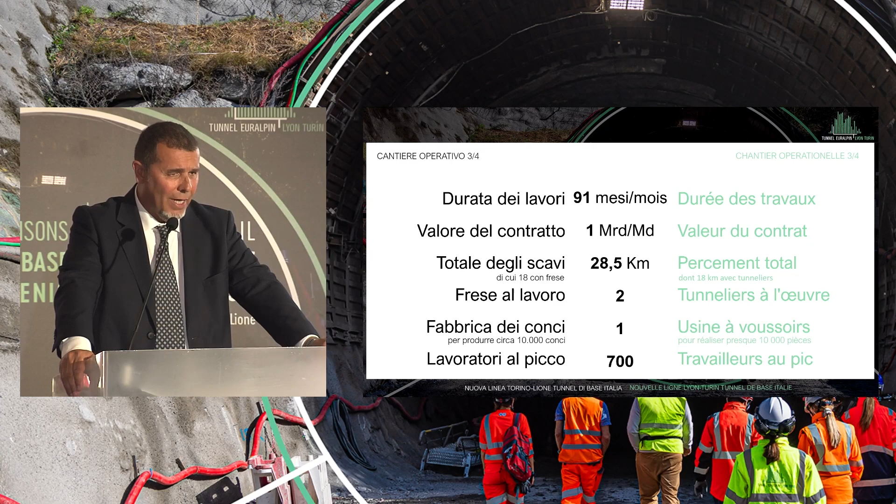As you can see in the slide, the work will go on for 91 months, 7 years, for a contract worth about 1 billion euros. The total length of excavation is 28.5 kilometers, of which 18 will be excavated by TBM, and you'll have more details about that by the work manager, with a positive consequence on job creation in the territory, because we have 700 more workers in the peak period.

So just to conclude very quickly, here you can see all the contracts awarded so far, and these are all. So you see just the skyline of our Alps between Italy and France, and all the operational construction sites. All of them have been awarded to rather outstanding groups of companies, mainly Italian and French companies, with some Swiss companies, both for constructions and work direction.

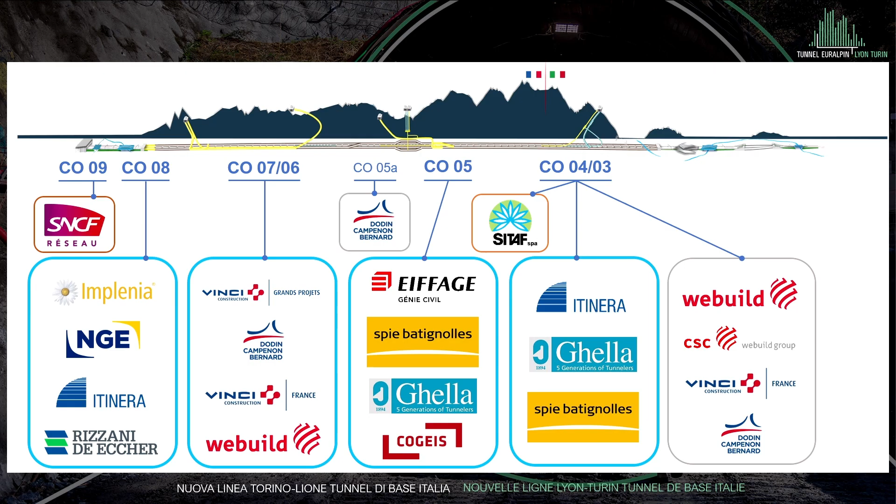We have awarded these contracts to very, very high-level companies, and this is justified by the value of the work, which is almost 10 billion euros that will be achieved by 2032, and all the contracts are worth from 300-400 million euros to several billion euros. We have already excavated 34 out of 64 kilometers of tunnels, and there are works in progress almost across the line, both in Italy and France.

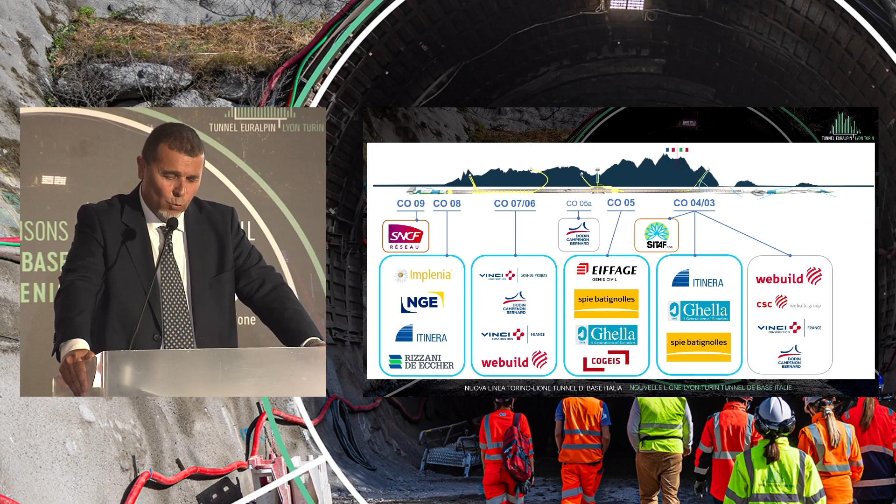So we want to turn it into a railway tunnel, and we have launched the contract for technological installations. It is worth 3 billion euros. It will start in 2027, and it will be completed in 2032. So with that, I'm done. Thank you for your attention.

Thank you. Thanks, Mr. Bufalini, for the details and the explanation. And of course, congratulations to the Italian-French companies that will be in charge of this tunnel, whose length is 28 kilometers, and we're going to touch it too sooner or later. But before leaving the floor to the construction manager, we have a short video to play to show you the site where the TBMs will start working.

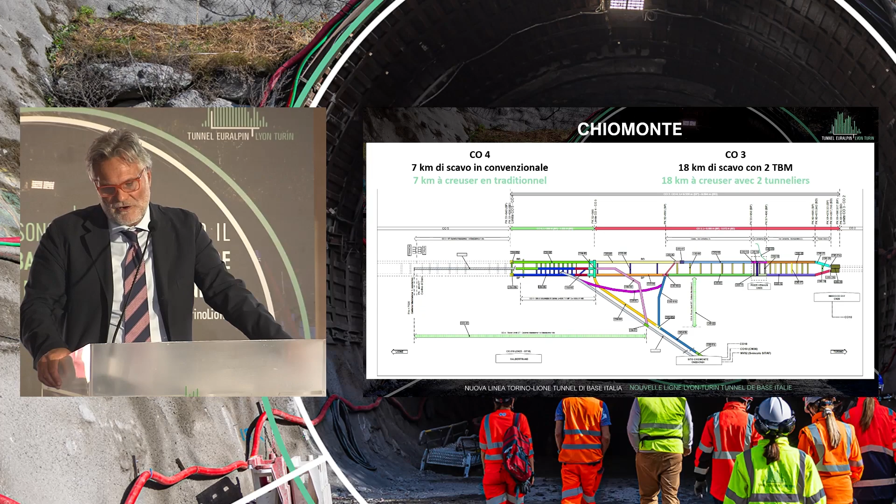And following the amendment to the construction sites approved in 2018, the excavation of the base tunnel will start in Chiomonte. Maddalena construction site is the first construction site opened in Italy in 2012, where the exploration drift was excavated in Maddalena. Now the niche works have been launched, and also the works for the highway junctions used and serving the construction site.

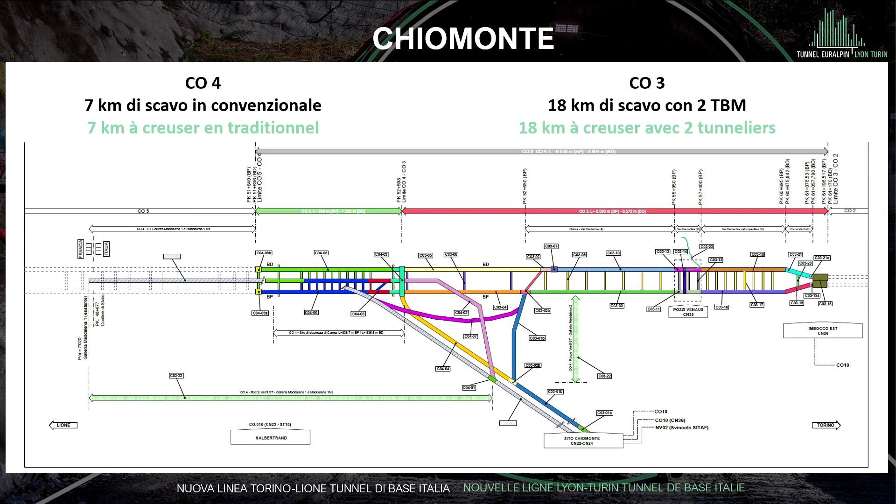These are the 2 TBMs, bimodal TBMs to be precise, having special features because they will excavate rock first and foremost, and then uneven lands in Cenischia valley and in the groundwaters. So it will go back, excavating rocks to get out in Susa, the eastern portal of the tunnel.

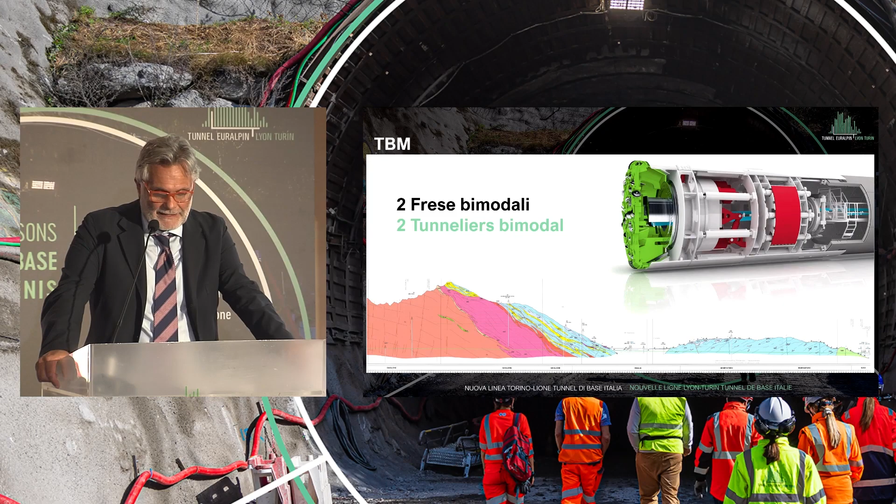We still don't know whether the rocks may contain asbestos. So this means technical challenges. You will have to go to 1,800 meters, and as we excavated the exploration drift, we found 42 degrees centigrade and a high level of moisture, almost 100%.

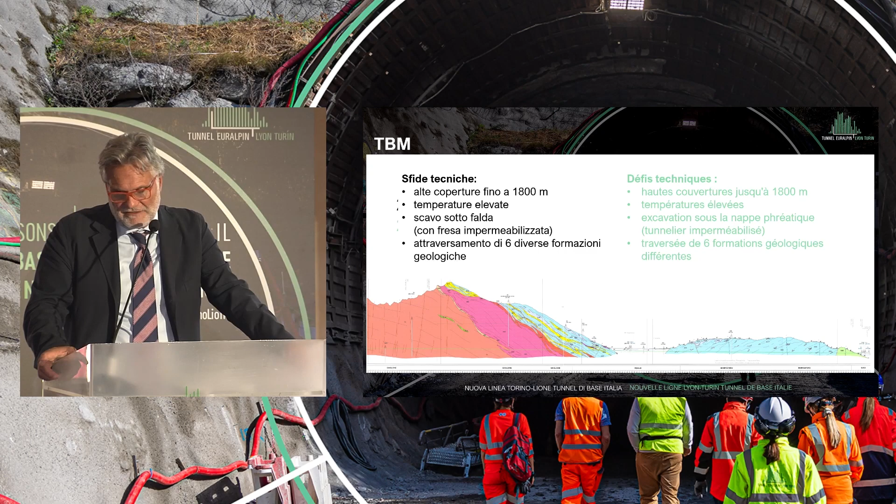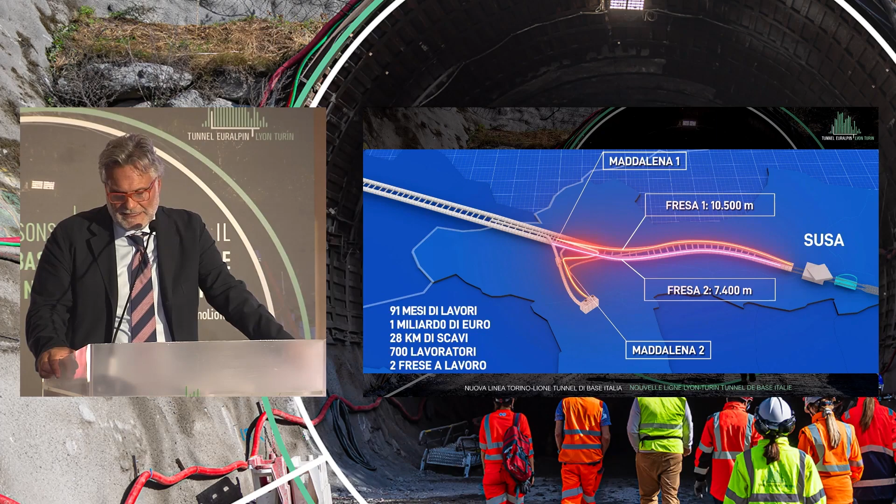So first and foremost, there will be the second inclined shaft to get to the base tunnel. Then the twin tube of base tunnel towards Susa for 7.4 kilometers. This is the first TBM.

In 2027, we will have the second one excavating 10.5 kilometers towards Susa. As Mr. Bufalini said before, the contract is worth 1.1 billion euros for 91-month work, 28 kilometers of excavation, and almost 700 workers.

Here you see Salbertrand site, which is upstream in the Susa Valley. This site will be in charge of reusing the excavation materials. That's where the voussoir factory will be located, and of course the voussoirs will be made out of the inert material of the excavations.

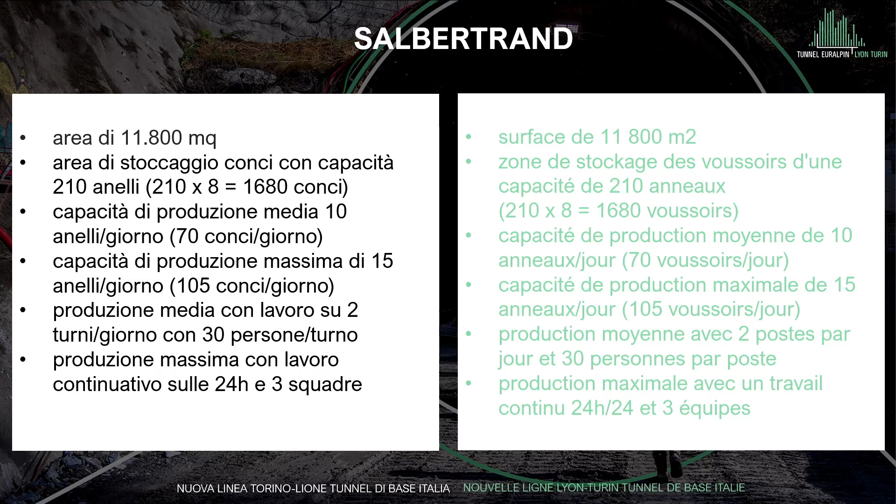At this moment, the site is being prepared, and by the end of the year, more contracts will be awarded for excavation material reuse both in France and in Italy. Because this is one single construction site, the excavation materials will be managed commonly based on a governmental agreement between Italy and France, because we want a balanced and harmonized reuse of those materials.

The area covered by Salbertrand site includes 11,800 square meters, and we will be able to stock about 210 rings, with daily production of 10 rings and maximum production of 15 rings per day. We will have 30 people working in 2 shifts, and at maximum production there will be 24/7 work with 3 teams. So you see, this is a huge work.

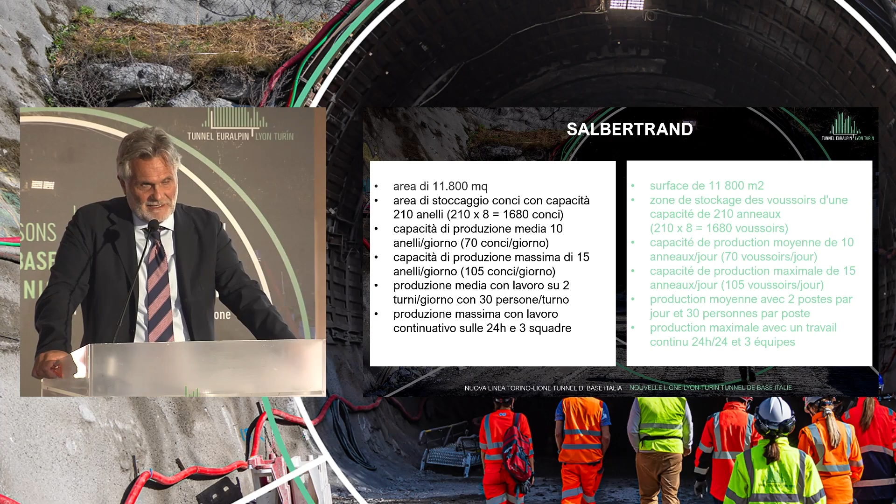And to the award winners, good luck.

Thank you, Mr. Gilli. So we heard from you there will be 700 people working for at least 7 years, so a huge impact on the occupation and employment of these neighboring communities. So to know more about that, may I ask Mrs. Manuela Rocca, the Director of Sustainable Development and Safety of TELT, to come up front to tell us how the works and construction sites will be harmonized with the neighboring communities.

Thank you. Today is a wonderful day because we could make it. This is a great success, but it's just one milestone, as it was said. We still have so many challenges to go.

So you've heard about what and who so far, but I'd like to tell you how this project will be achieved, through sustainable lenses first and foremost, because this is the only way in which you can construct such a huge work, which has a huge impact. The impact can be positive if it is well prepared in all its stages.

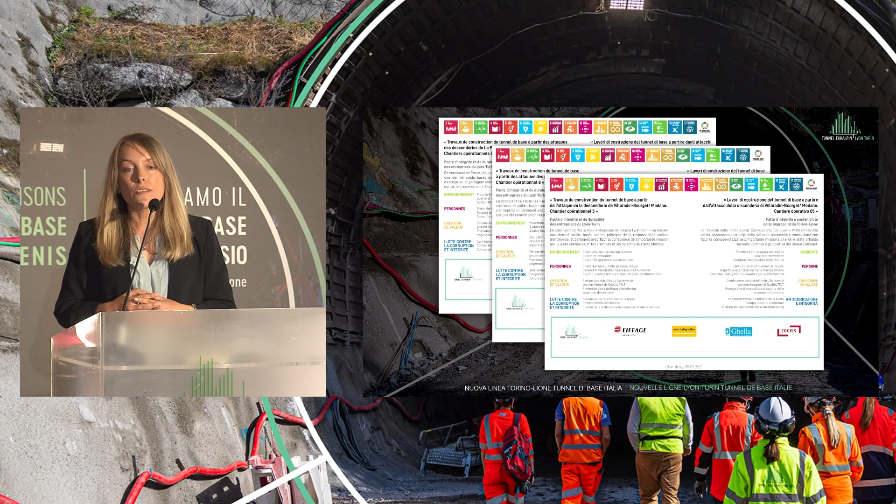So we can go on having some more details on these 4 pillars. This just to show you how the pillar looks like. So the contracts are something like 1,000 pages long, but they will also include these documents, and they're just as crucial as all the others.

About environment, of course, there are the inspections by national and international control and monitoring agencies. We also want to reduce our impact and to add value to the environment where we work. This is why we wanted to create many partnerships with international partners, research institutes, and universities on crucial topics like biodiversity, natural resources, and this is why we want to massively reuse excavation materials, not just in the different countries, but at a binational base. This is why we've been working for 5 years to have the first binational regulations to reuse of excavation materials.

Then decarbonization, of course. As for people, in the sense that we mean all the TELT staff, all the staff of the production sites and construction sites, but also people because we want them to work safely and to work in harmony with the territory and land they will work on, because social impact is paramount, because we are dealing with small communities and we cannot invade them. Of course, this might be an opportunity, but all the workers will learn to live in that community, to consume goods in the community, but this community must be well prepared and the project must be well prepared.

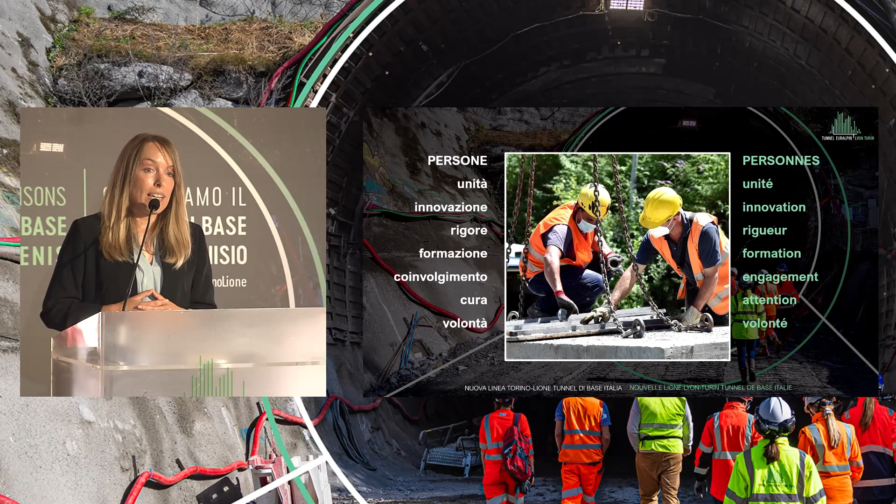This is why we signed the Patto per il Territorio, the Pact for the Territory, within Regional Law number 4 of Piedmont, expressly enforced so that the Piedmont territory can exploit the opportunity of this work in a positive way. Among the whole stakeholders of the project, training is crucial, because we want to rehabilitate and enhance the territory. We also have replacement clauses for all staff in the contracts at the end of the projects, to guarantee that job seekers in Rivoli and Susa might be favored when we look for staff for our construction sites, the current site and future construction sites.

I've already given you many details about the territory and social clause, and the démarche grand chantier and the pact for the territory. But first and foremost, one of our main choices is not to have workers enclosed in the construction site, so they live the territory. So they do not have any base camps - they sleep and eat outside the site.

And then lawfulness, of course. We are a public principal, so we must keep the highest attention on lawfulness. The controls and monitoring are based on ad hoc binational regulations, including anti-mafia regulations, and a list where thousands of national and international companies are listed. We also collaborate with Guardia di Finanza in Italy and the Anti-Corruption Agency in France for further inspection on the ongoing tender procedures.